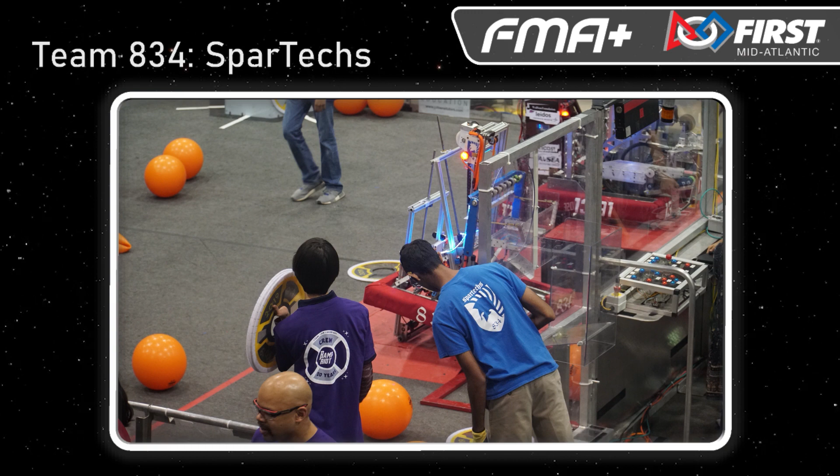So let's talk a little bit about your goals. Ryan, what were your season goals this year and why? In the off season, we like to set our goals. We normally plan short-term and long-term goals regarding competitions and such. Our short-term goals were to win at least one of our district events, whether that be Chestnut Hill or Seneca. If we get past that stage, we wanted to attend World Championship in Detroit and possibly get picked by a team there or be one of the Alliance captains.

That sounds like some solid goals, definitely well-defined, and the right balance of challenge as well as attainability, which is a good indicator of well-developed priorities. Speaking of priorities, Kyle, maybe you could talk a little bit about how 834 prioritized the different challenges in this year's game.

Right after kickoff, we started looking at what gave us the most points in the game and prioritized mostly based on that. We're starting with climbing, as that gave us the most points. We also want to be able to pick up, store, and shoot balls quickly, while also being able to store 5 at a time since it's the limit. And we wanted to hopefully be able to shoot balls from far range, hopefully with an adjustable hood so we can aim up and down.

Very cool. So let's start diving into that robot design. In the beginning, as Kyle said, we all get together and brainstorm what we want to do. We had a Saturday meeting and decided, all right, let's sit down and figure out what we'd want to do design mechanically.

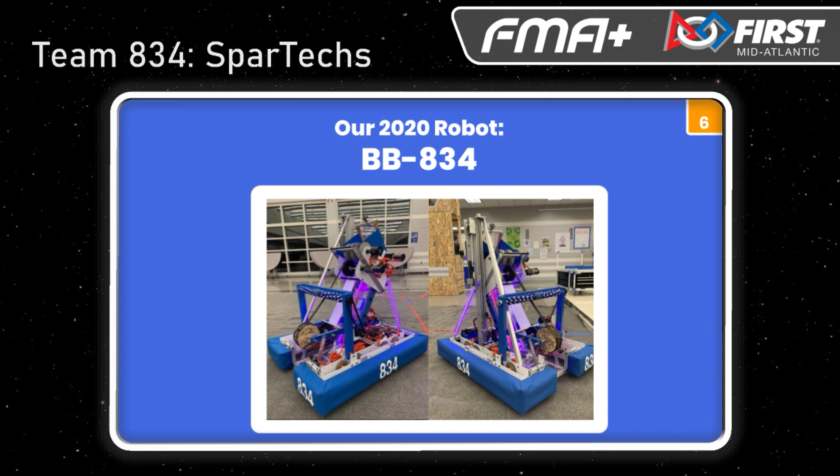Well, after looking through all of our choices, we put together the final thing, and we call it BB834. Let's take a walk through it.

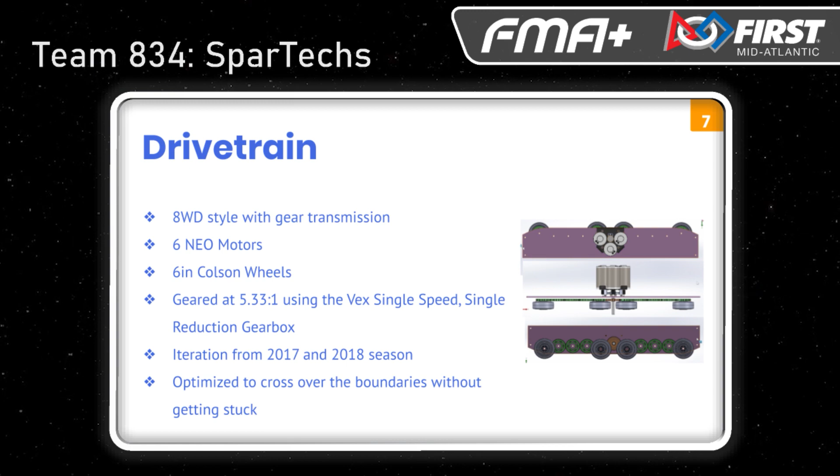Our drivetrain is a custom parallel plate 8-wheel drive chassis powered by 6 NEO motors, driving using 6-inch Colson wheels on a 5.33 to 1 reduction. The design is based off our 2017 and 2018 robots, with only a minor redesign to cross the 1 and 1/8 inch height barrier.

I'm a big fan of using the Colson wheels on the drive base, and given this year's terrain, it sounds like a really good choice. Obviously the 6-inch diameter is perfect for that barrier at the rendezvous point.

Ryan, can you tell us a little bit about the intake? For the power cell intake, we decided on a full width over bumper style, which was outfitted with the vectored wheels I mentioned earlier from Team 125.

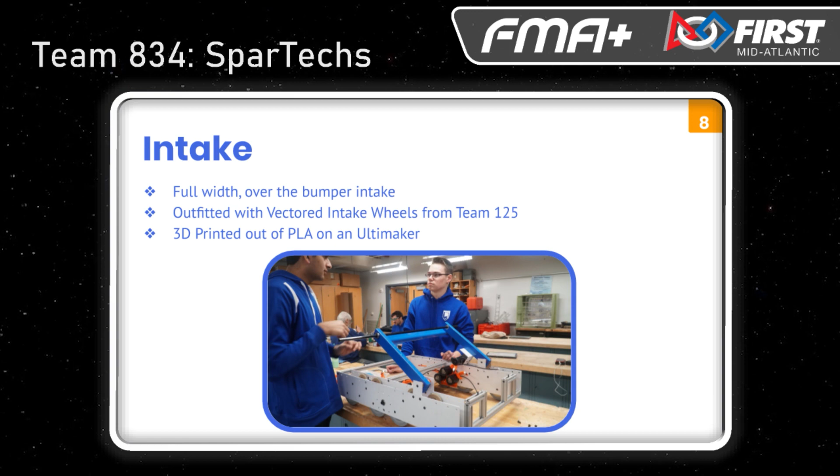The wheels allow us to index or center the balls from the start, so we won't have to do that manually. These wheels are all 3D printed from PLA material on our own team's Ultimaker and a Mentor's printer. Very cool, I love seeing the use of 3D printing sort of make this a revolution in FRC.

Kyle, what about the ball storage for the robot? For our storage, we chose to use a ball tube design, and it has a toothed belt on one side to move the balls up and down.

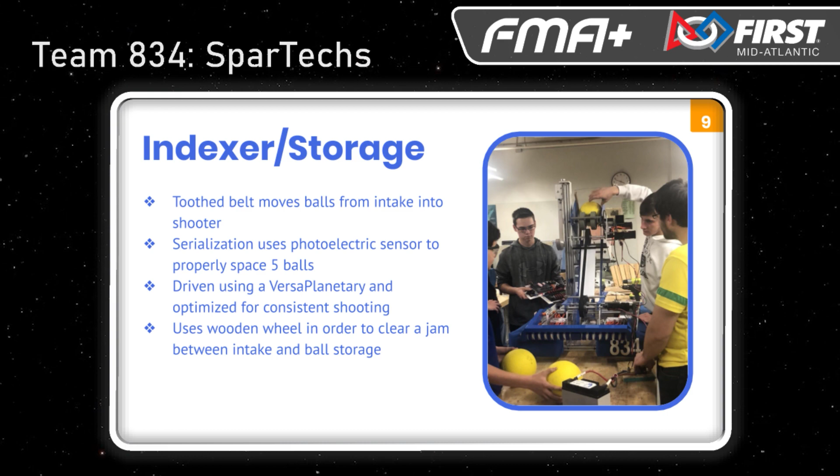The balls are spaced properly with a photoelectric sensor. We had one issue though making it - there was a dead zone between the intake and tube, so the ball would go into the intake but not make it all the way to the belt, and just kind of spin there. We fixed it by putting a plywood wheel in between them to keep the flow.

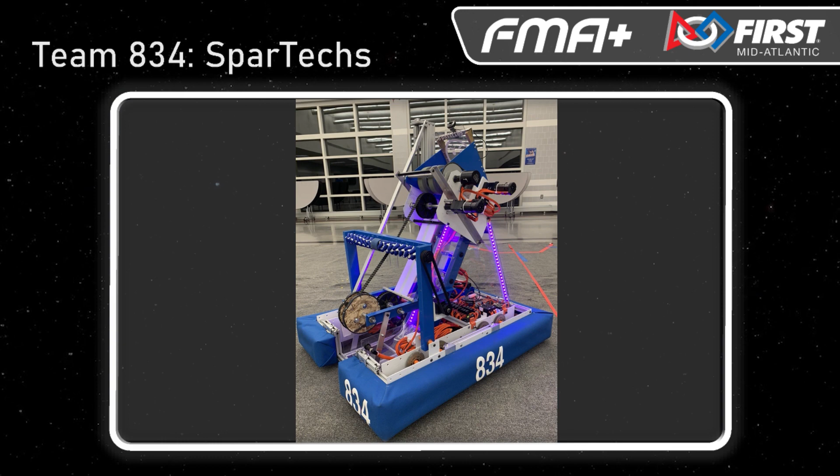That's awesome, super creative solution to a potential issue. Sounds like you guys got up and running pretty quickly too, which is good. Krishna, tell us a little bit about the 834 shooter.

Our shooter went through a lot of changes over the season. We started off like everybody, all for the 2-wheel shooter. It was giving us great results, and we were building it. We made multiple prototypes and it was working.

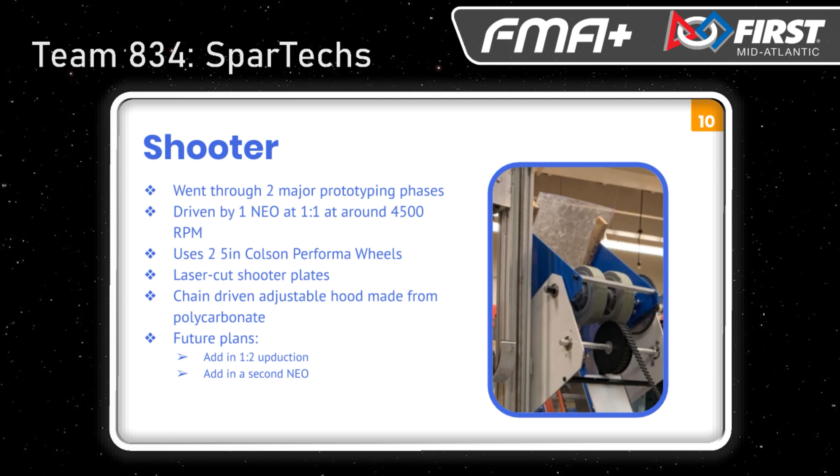But then a little bit later into the season, some students went back and made a single wheel shooter design just to test it, and we found that it was much better overall with more accuracy and further distance. So we ended up using a 1-to-1 shooter with a NEO, running at 4500 RPM, made of 2 5-inch Colson wheels with a polycarbonate hood.

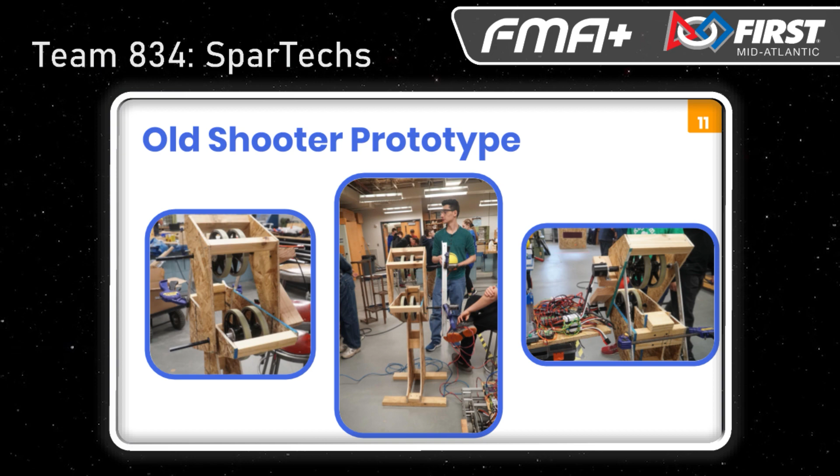This is what our old shooter prototype looked like with the original double wheel design, and this is what our new shooter prototype looked like with the new single wheel design. Nice, I always love hearing about the iteration that teams go through in their design process.

So Kyle, let's talk a little bit about Endgame. What does 834's climber look like? Our climber this year was made out of 2x1 80/20 with a similar style to that of our elevators from previous games. It uses a lead screw driven by a versaplanetary to move up and down.

Since there was a height limit this year, we used a torsion spring to flip the hook out for extra height. Along with our old goal of being able to climb from almost anywhere, our hook is double-sided so we can go on easily from either side of the bar. It worked pretty well this year from our testing.

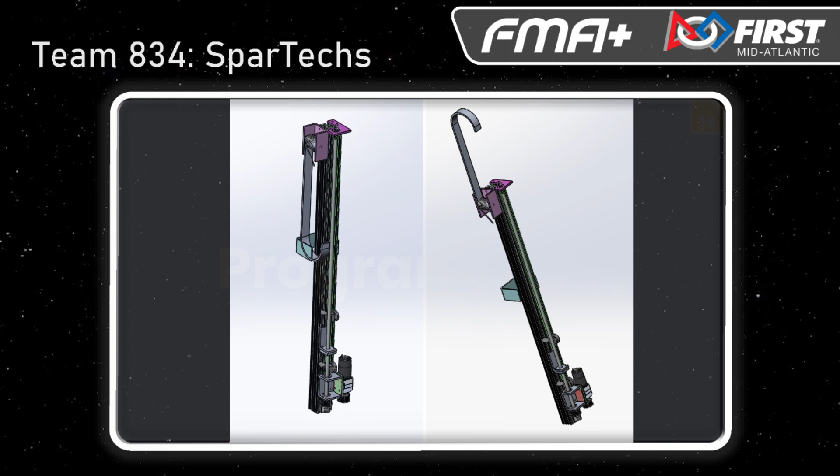An original goal was to have it slide along the bar to help balance out, but we couldn't get that running in time. That's a well-developed climber approach, it seems tried and true, definitely very practical. Krishna, can we talk a little bit about the programming side of things on 834 now?

Programming is always the fun part for us. This year we used command-based programming in Java. We also took advantage of the built-in PID loops on the Spark Max motor controllers to get the shooter wheel up to speed.

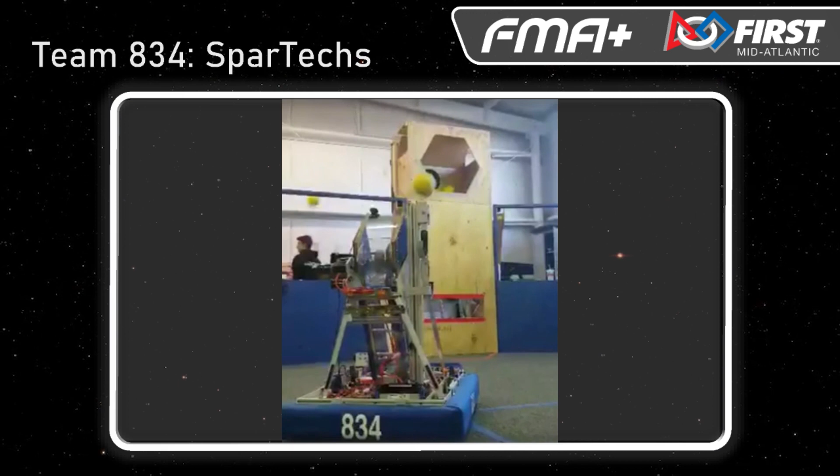We were able to test the 3-ball auton, and it worked, but since the season was cut short, we weren't really able to get further than that auton-wise. This year our vision was very different than most teams - we had a student put in a lot of work, and our vision system is based off of a neural network that we actually trained from scratch.

All the teams came together to label over 1,000 images, and with the help of AlwaysAI, the company, we were able to put a Raspberry Pi with a neural compute stick on board and run an AI vision system. It actually worked out really well. After a few weeks of testing, we were able to get it to recognize all the balls and goals with over 99% confidence.

Wow, that's awesome. Definitely a very unique aspect to the vision challenge, at least in our region, in FMA. I don't know of any other teams currently using a neural network they've trained from scratch. They might be out there, but I haven't heard from them yet. So congratulations, that's a huge asset and skill set your team now has, which I think will be helpful in years to come. Even though you haven't competed yet, I think the neural network is going to earn its keep in the 834 tool belt for sure.

Is there anything else about Team 834 we should be made aware of as we wind down here? We want to thank our school, all of our sponsors, coaches, and mentors who've helped us throughout this season and got us to where we are today as a team.

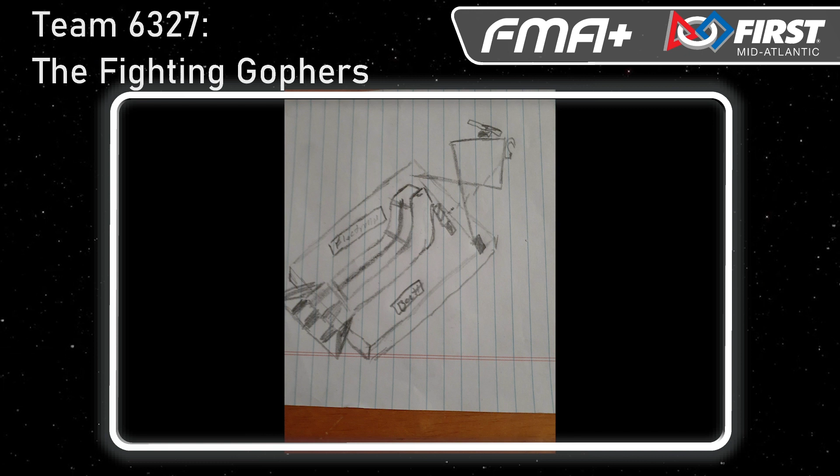Both strategically and also from a branding perspective. I think it's smart that you guys considered that detail when you were looking at the direction to go in with your final robot design. Were there any other reasons that you guys decided to go with a small or maybe a short robot versus a tall robot?

Yeah, so the whole reason we went with a small robot is so that we could use the trench and control panel to its fullest. We wanted to kind of use it as a highway where we would pick up balls from the feeder station and cycle them to other teammates that would shoot the balls into the goal, so that we could have a constant cycle of picking up balls, dropping them off, where they wouldn't have to go back and run around, where they could just sit in one place and shoot and gain as many points as possible.

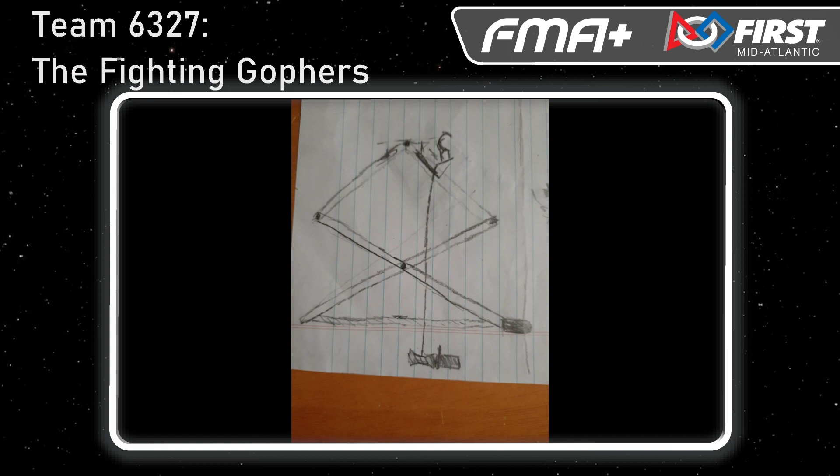We also wanted it to be small so that we could hide in the trench almost and shoot from there, and have a lot more protective shooting instead of having to deal with defense. Yeah, that makes a lot of sense. It's a smart thought about how you're going to cycle on the field as you make those design decisions.

So Francis, let's start from the design process as getting into building the robot. What was your prototyping process like? So as soon as we got back to the shop from our planning session on the road, we really just wanted to get as many different prototypes as we could so we could start comparing them against each other, because we had this long list of ideas from that 8 hours.

One of the things we were really focusing on with our prototyping, though, was the shooter. The rest of it, we did prototype a lot with it, but not as much. And with the shooter, we didn't know if we wanted to go with one wheel or two wheels, if we wanted to go with a lob shot or a straight shot. And we eventually had to realize that the ceiling was a bit too short, and so we kept hitting it, and we left a couple marks up there that the people weren't too happy about.

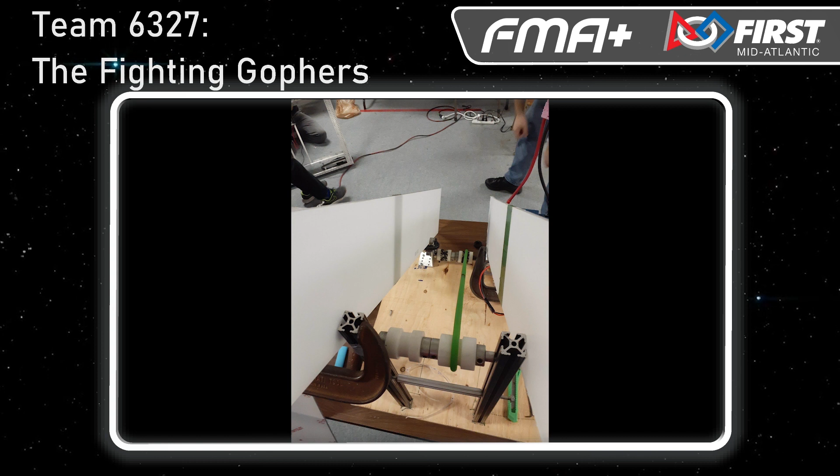Yeah, absolutely, that's a classic story from robotics teams past, the damaged drop ceiling. Maybe I don't know what happened to the drywall. It's crazy, somebody must have broken in and thrown a ball at the wall really hard or something.

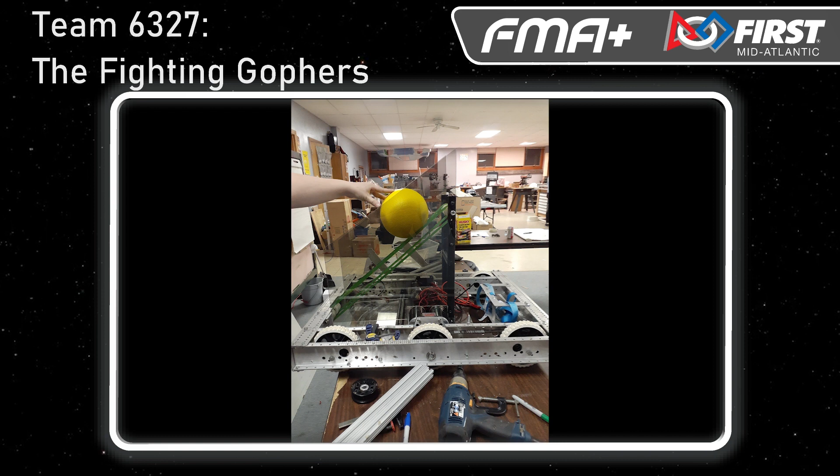Yeah, so weird. Let's talk final design now. So where did you guys end up with your final shooter approach? Yeah, so we decided that two wheels, left and right, would be our final design instead of the one on the bottom pressing up against another surface. We were hoping that the two wheels, since it's more of a direct shot, would be more accurate than the lob shot of the other design.

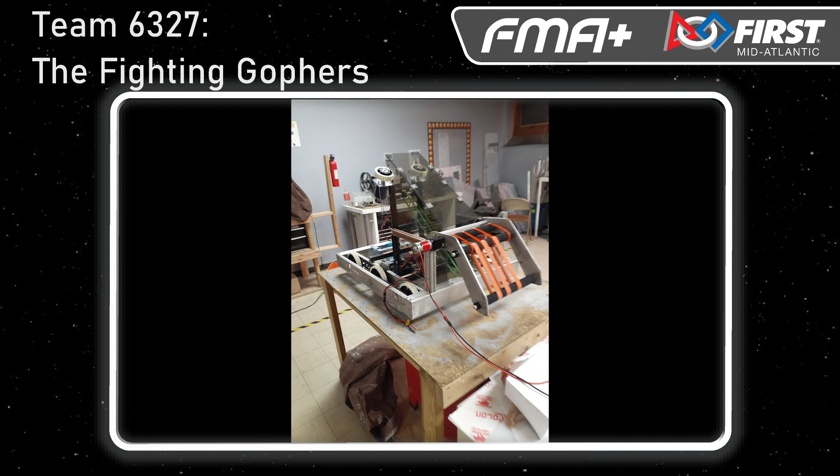Our shooter is also at a fixed angle, it's not able to adjust at all. We were hoping that we could just have one spot on the field where we could sit, and we wouldn't have to deal with changing the placement of the shooter each and every time we wanted to shoot. The problem that we did find was that when we were shooting the balls, it kept ripping apart.

We found out these maroon compliant wheels we had were able to grip the balls just as well. It was just as accurate, but it wasn't ripping them to shreds.

In most of the robot walkthroughs we've done with teams, we tend to go from the ground up. With you guys, we're going from the shooter backwards, winding our way backwards through the robot. How did you guys get the power cells into the shooter?

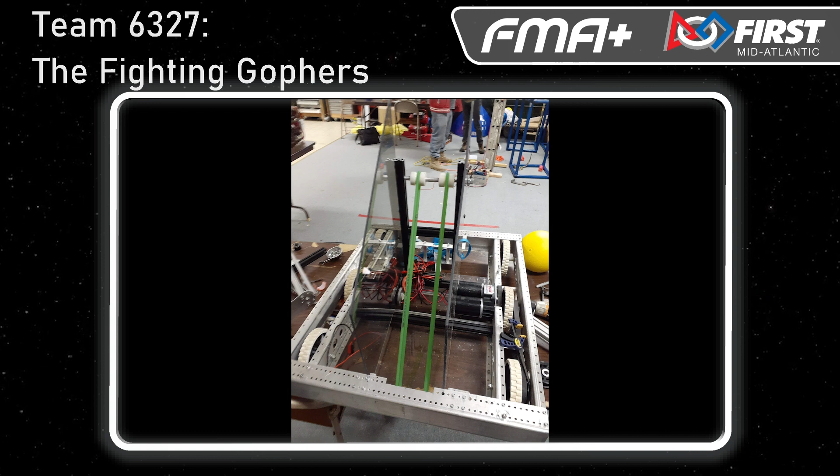So we used our advancer. It was extremely simple, and we got it built within the first 2 days. The part we really liked about it was that it was reliable. We used Delrin rollers, and we made extra parts so we could switch between different types of belting to see which one was best. We used Delrin rollers and belts and a piece of polycarbonate on top to compress the balls to take them from the intake to the shooter.

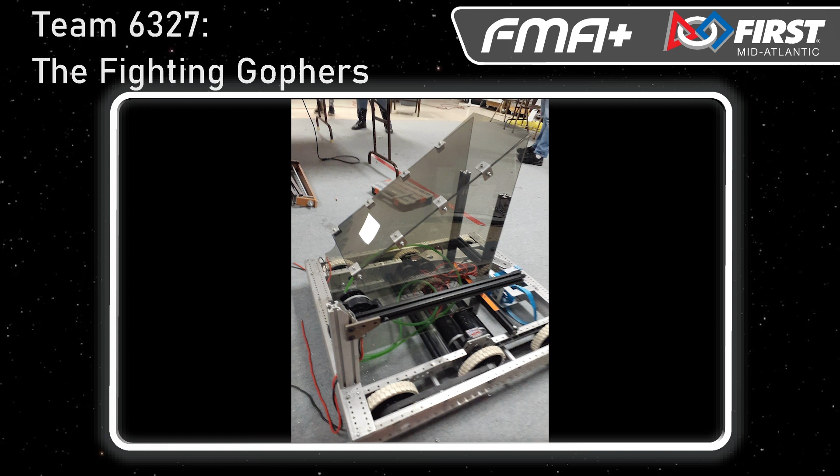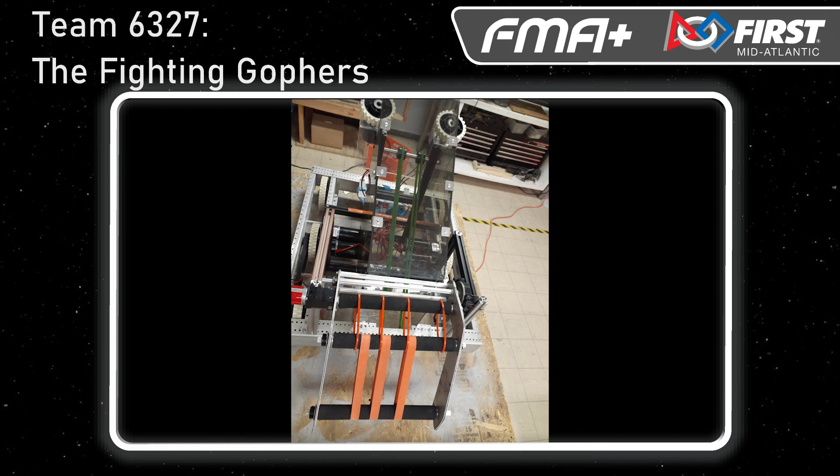I think the advancer being reliable like that is clutch, right? Reliability is everything, and so is consistency. It sounds like you guys have an interesting approach to this design, where you're thinking about the attributes to your strategy while also designing aspects of the robot, versus just coming up with a way to pick up a ball, pass it to a shooter, shoot it, and then figure out how to play with that. You guys are thinking about how to formulate your robot around a strategy you want to achieve, which I think is a really healthy approach.

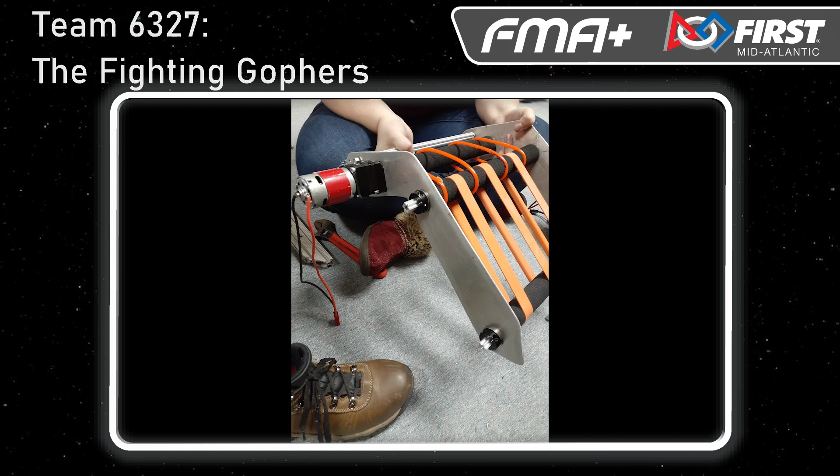So let's talk about the intake. Francis, maybe you can tell me a little bit about how you guys are actually acquiring the game pieces.

We followed that same strategy-first idea with this, and we really wanted to have the intake go over the bumper somehow, so we could be as strong as possible with our frame not having a giant cut in it, so we could play defense if we needed to, or if people were playing defense on us. So we started off by using the recycled arms from our sister team's Stronghold robot, because we liked how they would reach over the bumper, and the shape of them worked well for that.

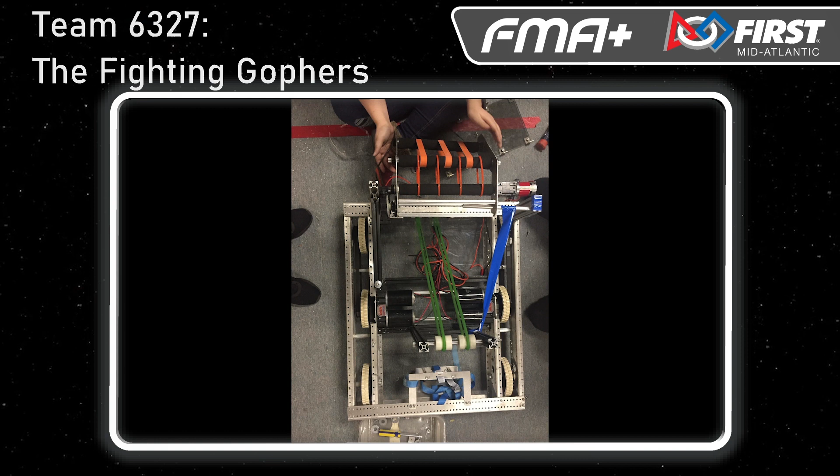They were a bit too heavy, so we made them into a metal sheet cutout of that. We started off by having a bunch of wheels on it, but that was too heavy, so we switched to the same belts that our advancer had.

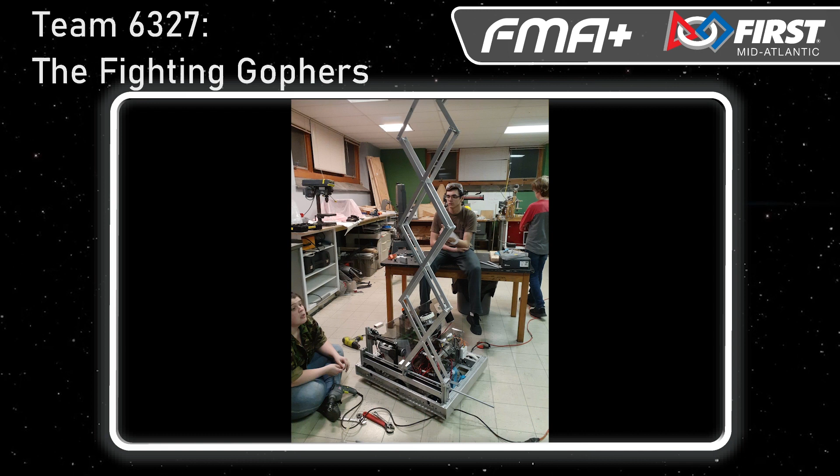What was your guys' plan for endgame? So we had the unique idea of a scissor lift. We wanted one on each side so we could climb better on the rail. We used recycled rails from the Pepsi factory.

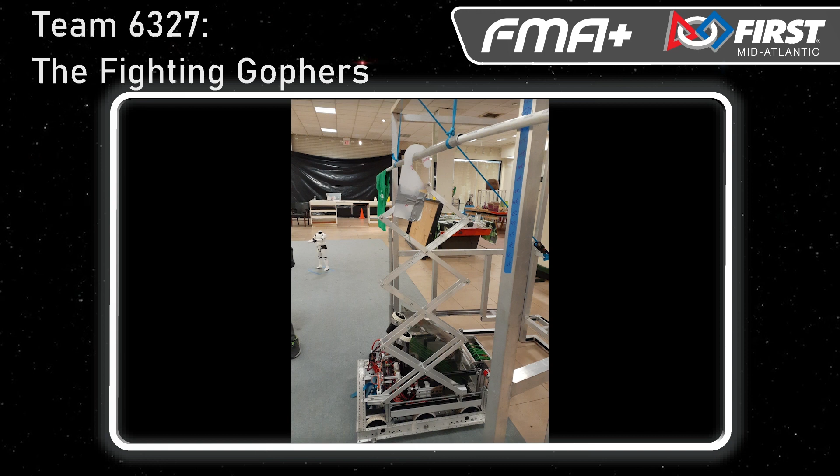We liked the worm drive aspect of the threaded rod, as the robot would stay up once the motors were turned off. We started with a chain and sprocket, but that did not work, as the chain would pop off as soon as the robot tried to lift. We changed to a direct drive, but that still struggled and the motor would still stall.

We reevaluated using the lift and the design we had already put so many hours into. We started working on how to use the lift for hook drop-off, using a separate winch motor to actually lift the robot. We were working on this final change when everything got shut down.

One of the biggest problems we ran into was the weight of our robot. With the scissor lift taking up most of that weight, we were trying to get as much weight off the robot from everywhere else to spare it for the scissor lift to be on the robot.

The intake had to go through multiple different versions just to get that weight down as low as we could, and we were switching aluminum to polycarb left and right wherever we could spare it without getting too weak in some areas. But eventually we had to realize the scissor lift was a bit too heavy to be practical, so it had to be switched to something else.

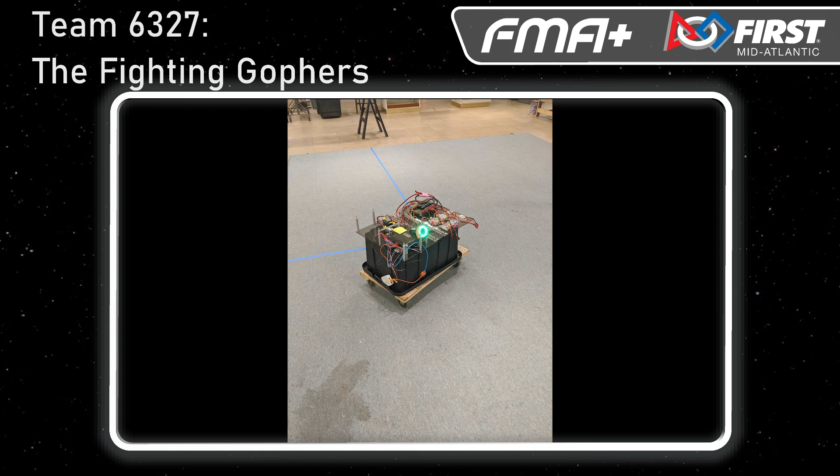Even with the mechanical problems, our electronics team was still able to continue working due to the fact that our electronics could be removed and worked on separately. We've been working on this electronics box over the past couple of years, trying to design it as tight and compact as possible. We wanted to be able to put it in our robot and not have to really think about it or deal with it being in the way of other functions of our robot.

We designed it to be easily removed, so during competitions, we can fix something quickly and put it back in between matches without taking too long. We built it side by side with our mentor team, 4575, so if we're both at a competition and either of us have a problem, they can lend one of the electronics boxes to us or to them to continue working during the competition.

I think that's a really clever use of components, right? When you know something's going to be serviced all the time or most of the time in the pit, might as well make it really easy to work with.

Did you guys have any other challenges this season you want to talk about? Yeah, so in early January, we had a lot of team members out sick with a series of colds and the flu throughout the season. When you only have 6 team members, having 3 out sick for a meeting puts you way behind schedule.

And if that wasn't enough, in February we tried to move our entire shop. We had to move every single machine that we had, and some of them were a lot of work - just the lathe itself took almost an entire day to move from one shop to the other. And while we were trying to move, we were still trying to run FLL and FLL Junior. That didn't go too well because we tried to do it in just a weekend, but it wound up taking a week and a half, which wasn't that great.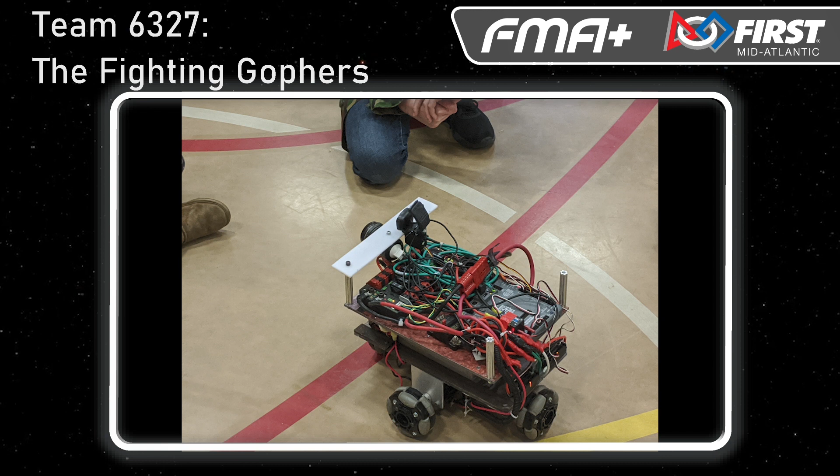A lot of times we bring out this scrubber droid. Jimmy, do you want to talk about that? Sure. So we have a scrubber bot, modeled after a Star Wars droid scrubber bot. It's small so it can fit in the back of a car. The little robot has 4 omnidirectional wheels so it can drive in all directions. And it also doesn't scratch floors, which is very important - you don't want to leave scratches all over someone's floor.

And we use it in our current shop, the mall, as constant outreach. It's made of recycled parts, and it gives people a look into what FRC is like because it uses FRC electronics and coding. The bot was really helpful at events we went to, such as Robot Stock. There, the Tin Mints gave us a section to work on that we called Maker Row, with tables set up where makers could show what they work on and their hobbies and interests. There was a table there that we called Take Apart, where old electronics were available for people to take apart and reverse engineer to figure out how they work.

Everyone had safety glasses and screwdrivers to figure out how to take them apart. That's awesome. I think as a little kid I would have been a huge fan of the take-apart table, and I would not have known what to do if you asked me to put it back together. More than likely. Same.

I'm so excited to get back to competitions just so I can hang out with the Fighting Gophers. I know exactly what pit I'm going to be hanging out in for the rest of the season. So if we want to learn more about Team 6327, now the Fighting Gophers, where can we learn more or contact you guys? You can find us on Instagram, Facebook, or on our website.

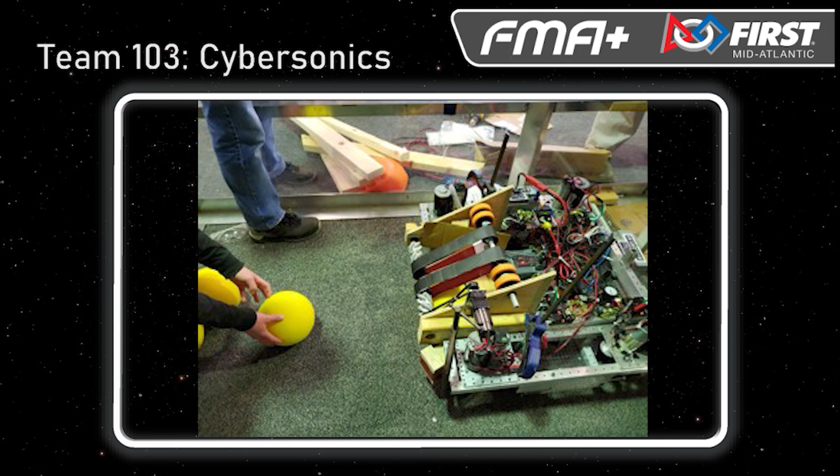One thing we do that's a little different than a lot of teams is the students kick the mentors out into a different room, so they can talk what they want to talk about and we get to talk what we want to talk about. We find that it doesn't allow the mentors to taint our minds and really influence our decisions, so they can come back and see what we came up with.

Then after we do all of our discussions on what we want to focus on and what we decide to go with, we start prototyping. At our school we have a full machine shop, which is really super useful for FIRST Robotics. It allows us to create a lot of interesting prototypes and robots.

This year our prototyping was very in-depth. For me as a senior, it was the most prototyping I saw throughout my four years. It was really cool to see how we chose something and then modified it as we went through the design process, how we ruled out certain designs, or implemented one design into another to make a mishmash.

It's always really neat to learn about teams' prototyping processes, and I especially love the idea of kicking the people with too many perspectives from previous seasons out of the room and letting you guys fly.

That's definitely interesting. What about the build process? So you do your prototyping, you figure out what you want to do. What about that actual manufacturing process?

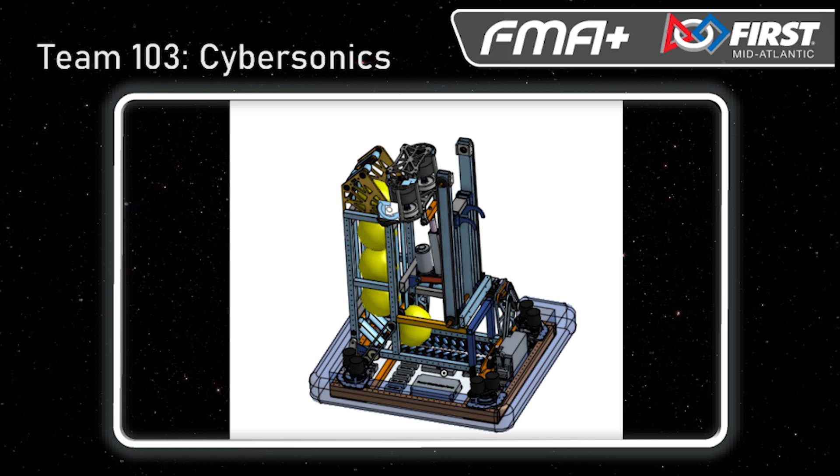Over the past recent years, we've really increased the amount of student involvement. For me, the past couple years being an upperclassman, last year and this year, I've really had the opportunity to teach the underclassmen what I've learned, and it allows for a lot more student participation.

If you ever come into our shop, you'll see a lot of the students doing a majority of the work, and a lot of what they learned was taught to them by an upperclassman who had the same opportunities and learned it from a mentor in previous years. Then we get to teach them the problem solving and machining skills they'll need to teach the underclassmen eventually when they become an upperclassman.

And then you also have the mentors who volunteer their time to come in, and they get to give their perspective, teaching you the super valuable knowledge they've gained in their industry. It's just a really fun process.

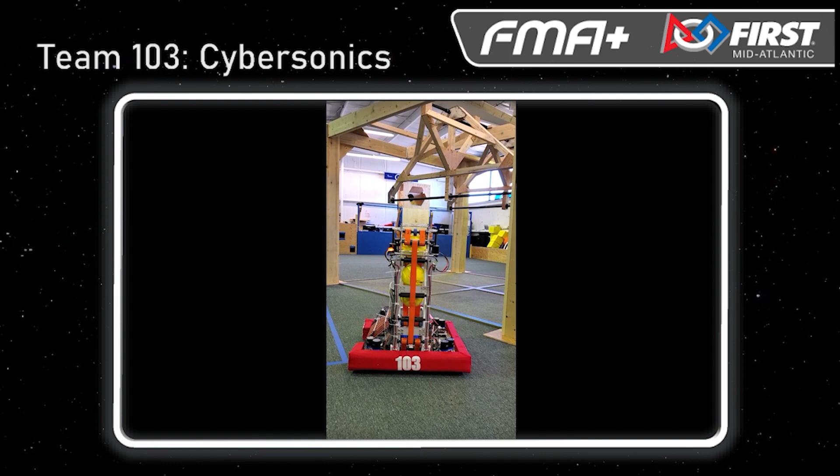Yeah, that's cool. I appreciate the attention to trying to cultivate the next generation of Cybersonic team members. So you, as upperclassmen, recognize the responsibility you have to make sure the underclassmen are brought up, which keeps the team thriving, successful, and competitive for years to come, which is great.

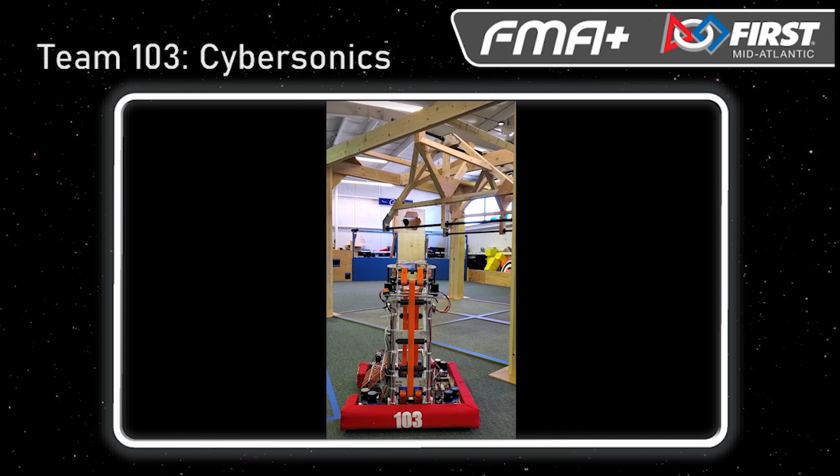So Colt, can you tell us about the building of the game field itself? Yeah, of course. Every year we get our parents together, so the parents of the students actually get to get involved in this one, not just sitting on the sidelines. Our field is built by parents and volunteers, and it's really awesome. We build a mostly fully functional field, except for a couple of the fancy lights and stuff, but everything works.

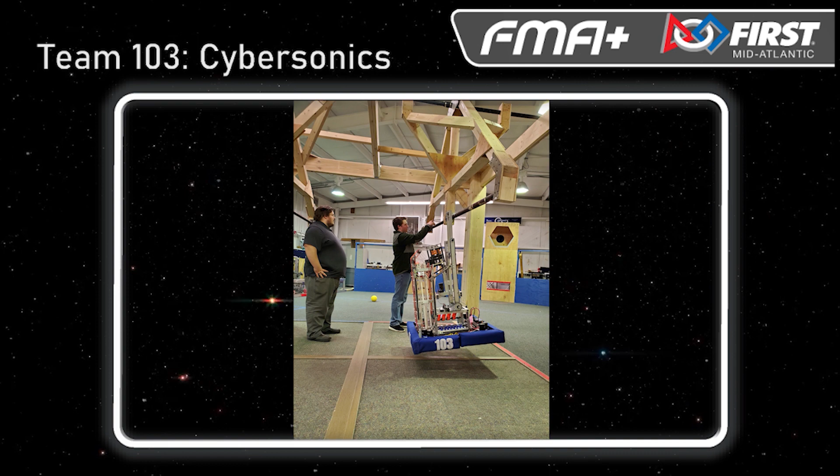And we build one every year. The parents get to come in and build it. It's a really awesome opportunity. My dad personally has done it, came in and helped, and he said it really gave him a deeper appreciation for what we do as a team.

Yeah, I know in the early days of my team we didn't have a practice space, and we're not that close to 103, so we hauled all the way out to that field to make sure we could practice, and it changed the way we do our build season.

So the fact that you guys have that field and make it available is just awesome. Now, there's something in here I gotta ask about. I just see vacuum sealing. Can you elaborate on what that's about?

Yeah. So teams over in Asia and whatnot, and Israel and all those teams, getting power cells out to them was very costly, because already here in the US they were really hard to get your hands on, and over there they were also super expensive and at really absurd prices. So we decided to help relieve that a little bit and take some of the pressure off. We got quite a few power cells, so we ended up vacuum sealing quite a few of them so we could ship them out to teams in Israel, Asia, or wherever, and help them so they didn't have to spend as much money looking for them.

That is awesome, super creative solution for a problem in terms of shipping, right? I imagine most of the high cost of shipping power cells doesn't come from their weight, it comes from their volume. So reducing them down into little pancakes must make it much more cost effective. And I'm sure the teams overseas were super appreciative, I'm sure you guys really helped them out. So kudos to you guys.

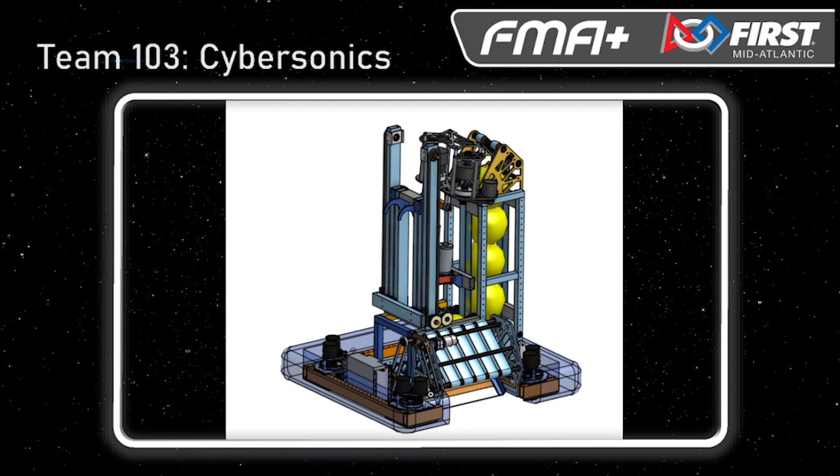As well as doing vision, because in past years we had vision like back in 2017, then we didn't really use it that much because I didn't really know what was going on. Slowly figuring that out and implementing it into a robot was really awesome.

All right, well, thank you for letting us in a little bit more to your season, to your process, and to your space. Mackenzie, Eric, and Colt, as well as mentor Carlos, we so appreciate your time tonight.

If I want to learn more about Team 103 Cybersonics, where can I find you online? So last year, our freshman created a new website all by himself, so we take pride in that. And he's now a sophomore, and he has moved on to our business plan graphics. But you can find us at cybersonics.net. Our website has information about our past robots and our team history, as well as our student and mentor board, and also how to reach out and help us fundraise or help with building the field as well.